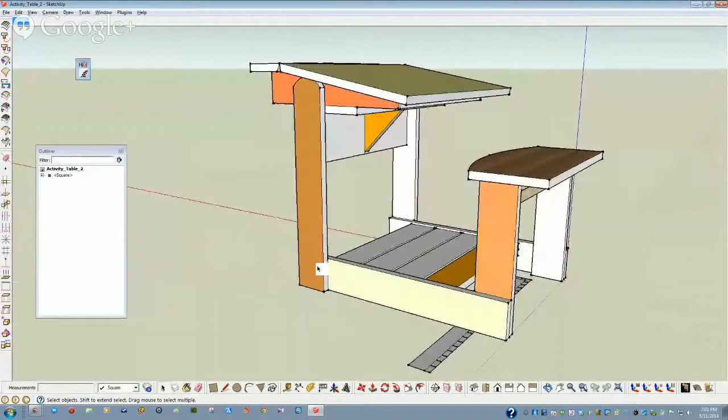I will downsize this one, and I'll open up... it's going, I have a lot of things going. This is the problem child we're going to be dealing with. Whoever did this didn't have any safety rules in his brain. He probably uses a chisel for a screwdriver. We'll just wander around some and show some things just so we can kind of get a look at it.

I went in earlier today and added these colors to try to figure out what I wanted to highlight and use and what I wanted to get rid of. I really don't like the background he's got, but he probably didn't bother learning how to make it right.

One interesting thing here, he's got one component, a square. Why in the world would you do something stupid like that? Get rid of it. Anything you put in here that doesn't do any good is a waste of time, and computer space, which translates into time.

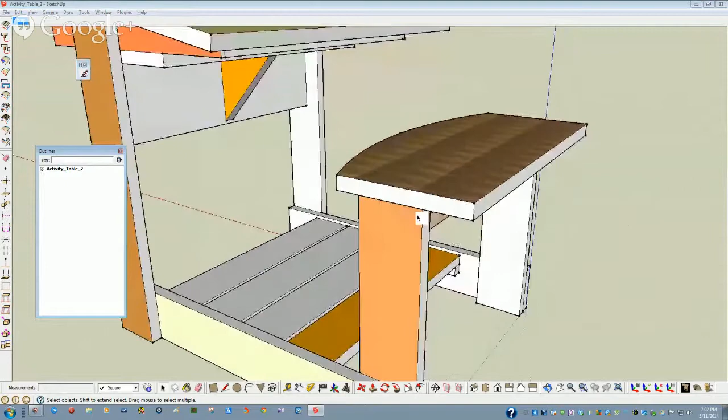Now I'm going to go in and try to clean up this crud he's got right here. That is in the settings someplace. I think it's under... let's see if I can find it. If not, I won't worry about it.

View, edge style, profiles, right here. Profiles make things darker. You can see, I'll go back and do it again, turn it back on. Your view, edge style, profiles. See how things get really, really bright? This line and this line. Why? I don't know.

Okay, back to view, edge style, turn profiles off. Already looks better. We'll go back into view, turn edge style and extensions off. And there's something else there. What are those? Let's go back into view, edge style. Well, we want edges on. Because otherwise, in fact, I'm going to zoom in right here and show you the reason we want edges on.

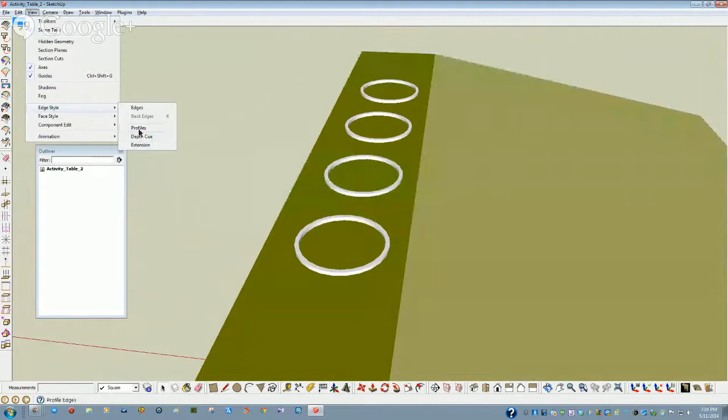Edge style. See this line right here? That is an edge feature, and I have no idea why. No need for it to be there.

Now let's go in a couple more spots here. This is something you really don't want to have on. Shadows do absolutely no good for a design. So I'll go in and turn those off. Go back in.

Shaded with texture is good. Back edges, I like turning those on. It gives me a depth that I can see in back of it. If you don't have that on, sometimes you will be picking things and it will be going to the back edge and you won't know it because you don't see it.

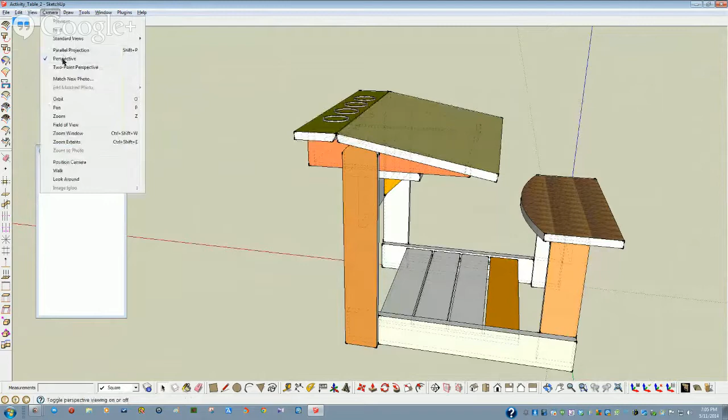What else can we do here? Well, one thing, we can go into view, into camera, and turn perspective off. It is so stupid. For buildings, it's great. For a kid's activity desk, it's ridiculous. And besides that, it doesn't print well. If you have perspective on, printing is going to drive you even nuttier than printing normally does with this program.

Okay, you can see that I have certain intellectual issues with SketchUp. I have with every program I've used. You just have to kind of learn to roll with the punches.

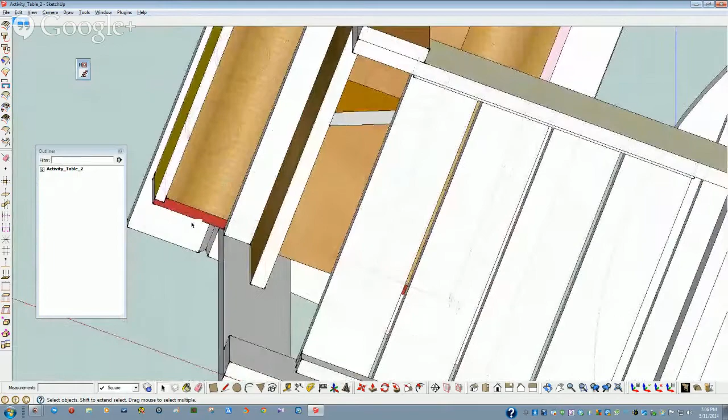Something else you would really want to do, either as you get started or just very shortly after, is decide what kind of joinery you want on this. He's got two rebates on this, and that's the only fancy joints he has. You could screw and screw, yeah, glue and screw this, or you could simply nail it. This would be a real nice one for pocket hole joinery. If you're really crazy, you could go with biscuit joints. I can't afford a biscuit joiner, so I ain't gonna do that.

I'm yawning because I'm talking in a lecture voice, and it causes me to breathe differently.

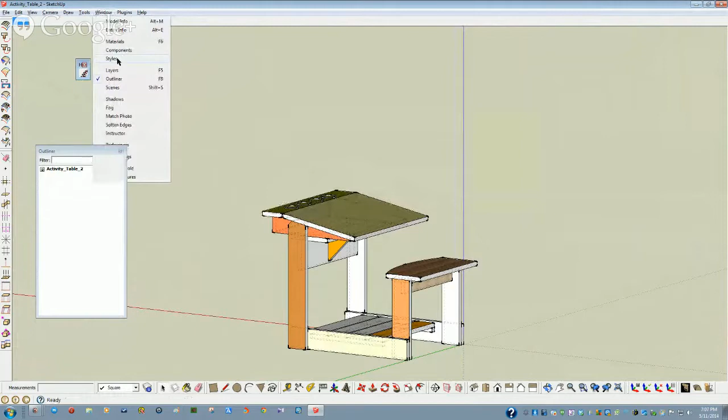So here we have... let's see if I can turn the style off some. I wish I could go find my own style, but I can't. So we won't.

I'm going to change this to a nicer light green. I'm going to go into the color wheel if I can find it. There it is. Let's see... oh, that's not a nice one, that's ugly. Back to the color wheel again. That's somewhat better, it's easier on the eye.

In here you can change how this responds to you visually, the selection. So when I go in to pick something... oops, wrong button. I'll get it. It highlights blue around it. A lot of things you can do with it, some are important, some aren't.

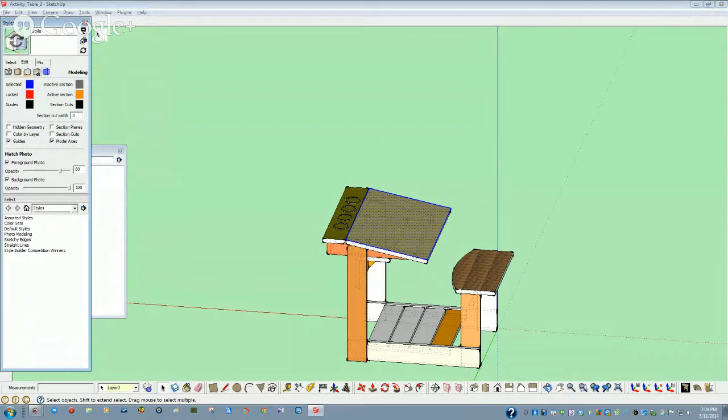So, enough with that. Now these spaces that I have highlighted, I'm going to select all of them on one side here, and I'm going to move them out with this key right here. I'm going to copy them out 10 inches.

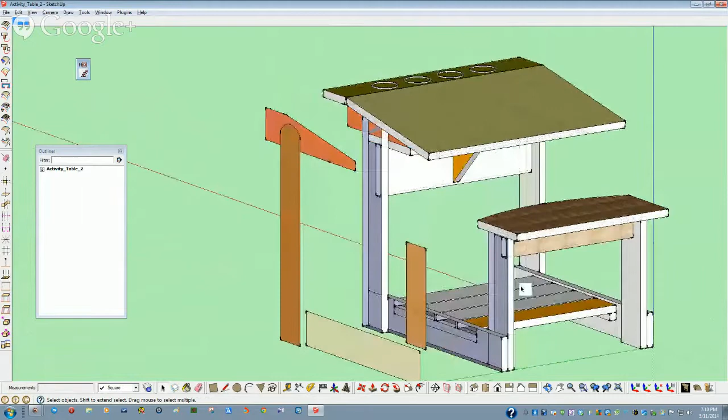Now I'm going to go in and get rid of that one, and that one, and this one. Now these are made out of standard 1-inch lumber, so they're 3/4 of an inch thick.

One thing we'll notice in here, on one of these, if I can find it - well, first thing is I'm going to take this top, I'm going to copy it up 10, and I'm going to get rid of this.

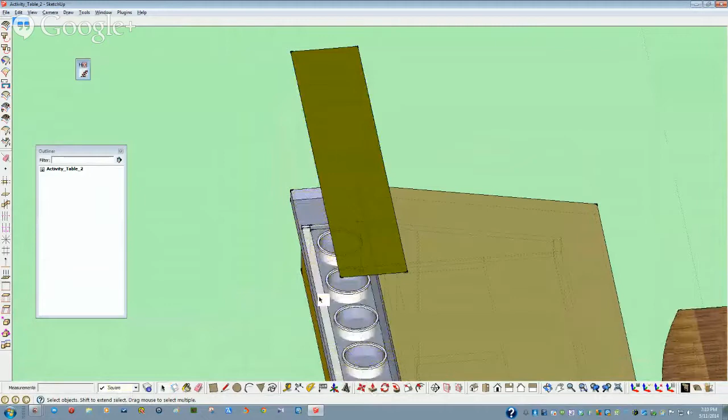And you'll see some really strange things going on inside this thing. These are cups - you couldn't tell it the way he had done it before. I have no idea how he managed to put these circles in here without putting holes in this plate. I have no idea, and I don't want to know.

But I'm going to take this top, the writing surface itself, and I'm going to copy it along here 10 inches. And we'll get rid of this surface too. All we're doing is going in and cleaning up and seeing what this guy has done to us.

I'm going to select this surface and this surface and move it 10 inches along the red axes. Yeah, I also got one of my circles there. That's all right.

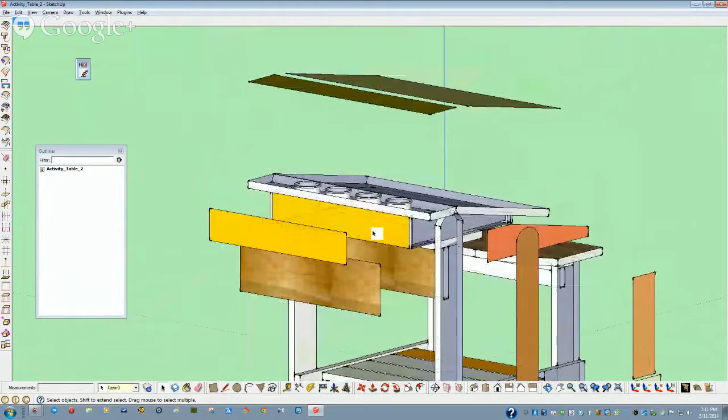So now I'll go into this one and this one and delete those. My hotkey for delete is, surprise, delete.

Now, I actually could come over and take this surface and this surface and move them out also, but that doesn't make any sense, because when we get done, for the time being, this board and this board are going to be used twice, as will this one. So I'm just going to delete these.

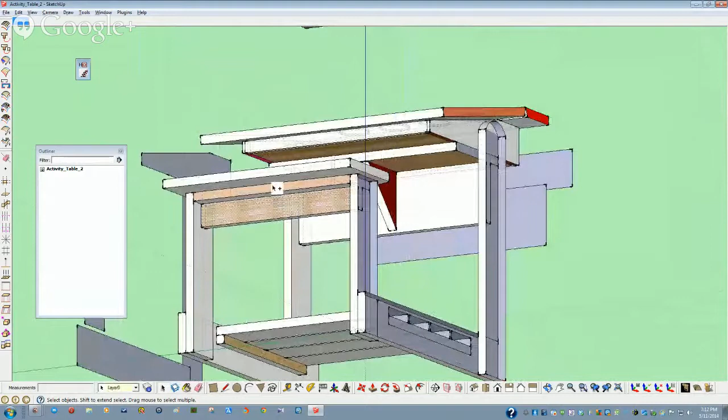So now we have more geometry we need to move. We need to take this one and move it back, copy it back 10 inches. Why 10 inches? So I won't forget what I did.

You'll notice that when he created this thing, his brilliant joinery, the way he made this geometry constructed, he put a hole in the side of it. Probably not the best combination you've ever come up with.

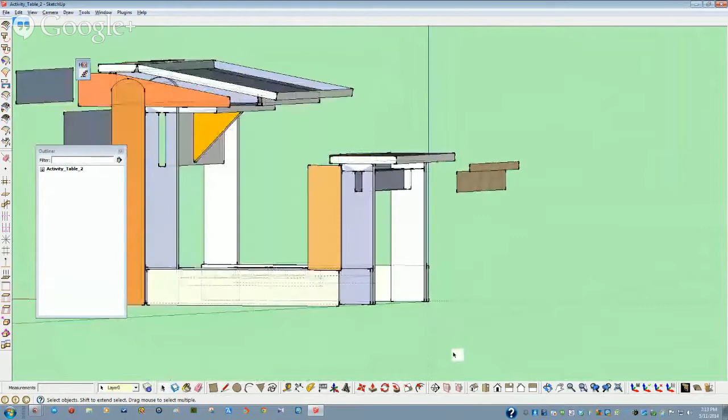I'm going to take this one and move them vertically 10 inches, copy them rather. And go back in here, and here. And I hold the control key down to get more than one.

And now we have our floorboards, we have our uprights, we have our seat, we have our reinforcing boards. One thing I don't have done yet is this triangle, and I'm just going to leave that for the time being, because I'll get to it after I move some of the stuff around.

So now, let's go in and give some of these things depth, or make some components first. Triple mouse button, Shift C is a hotkey. Create. Double mouse button rather to get this.

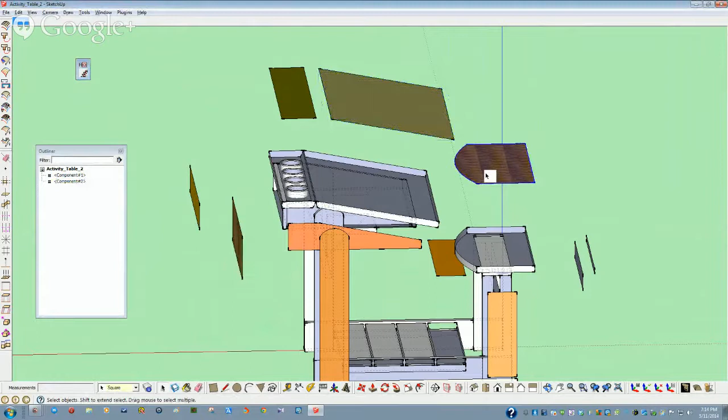Shift C, create. And I'm just going to do this a whole lot, so I'm not going to say the same thing time after time after time, so I get bored doing it. If you forgot, hit the rewind button.

Because bookkeeping and file maintenance on this is no more fun than on anything else. And that's all I'm doing.

Okay, now let's take all of these components, start at the top, hit your Shift key, go to the bottom, and let's hide all of them. See what we still need to do. We have one here, one here, one here, and one here. Okay.

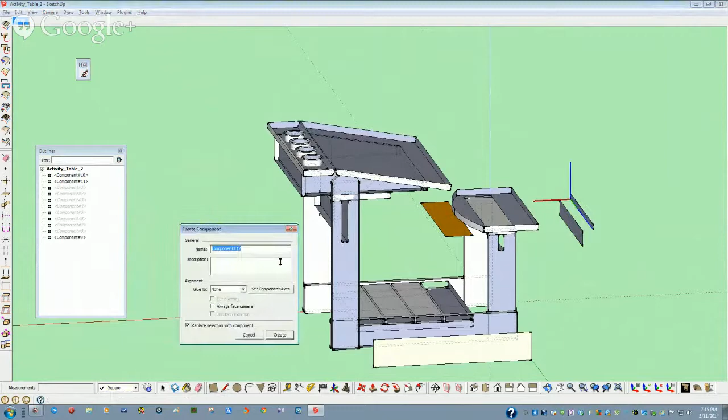Now, a lot of people have complained that I don't go through and give these things proper names once it's already a component. I don't care, because highlighting it tells me what component I'm dealing with. For those that need it, what would you call this? Bottom side panel 1, front side panel 1, rear side panel 1, and then side panel 2, side panel 2? No, that doesn't make any more sense than what I'm doing.

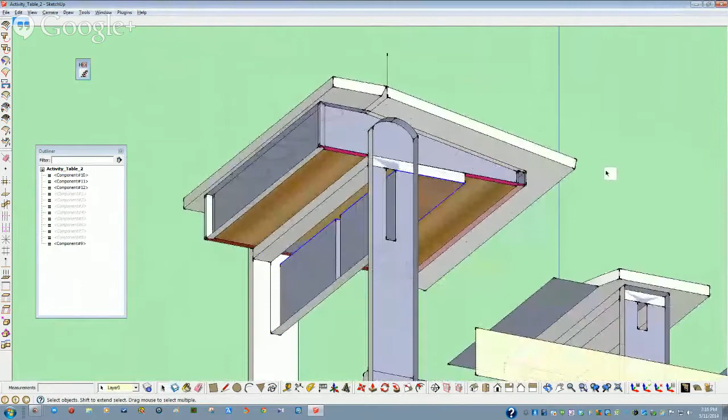Okay, I'll leave this one here and just make it a component right now. And I'm going to make this one a component too, and you can see what I was getting at here. Have I made this one a component yet? I have not. Let's unhide everything — yes, this one is not valid yet.

So what I'm going to do is go into this and delete this thing. In fact, I'm going to delete most of that — it's not doing me any good. Now, the way he created this makes this and this two separate entities. I'm thinking, since the joint is on that surface, it's supposed to be one entity.

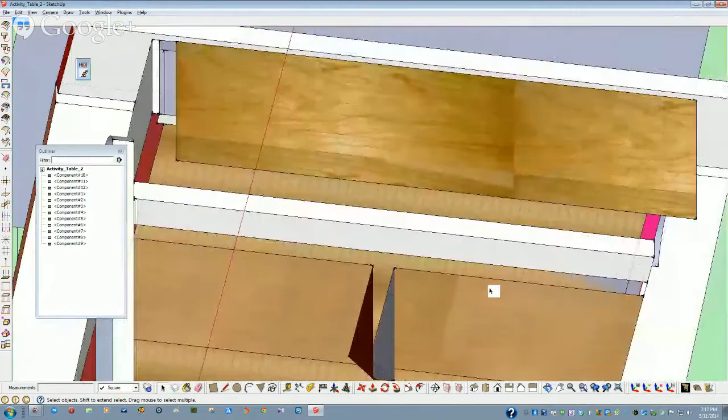So I'm going to twist this around a little bit, try to grab some more of it, not get rid of too much, but at least enough that I can see what I'm doing here. Let's get rid of this one. And lo and behold, it's too much. So I need to come in here. Try to keep up with what you're doing, because I'm getting confused.

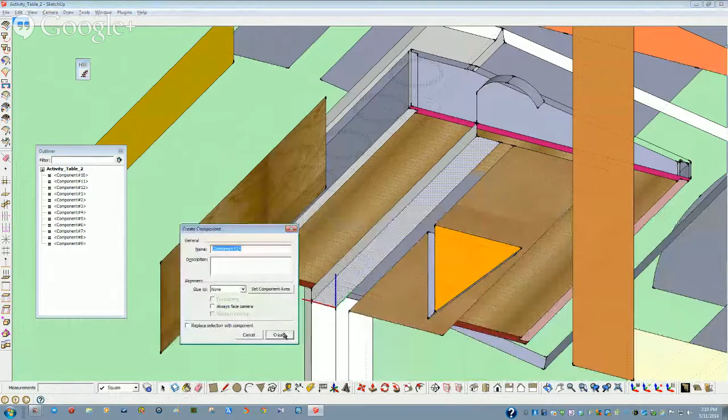Let's get rid of this bottom. Well, I'm working on that bottom panel right now, and that's the problem. So let's select this — Shift C to make that a component. I hope I got the whole thing, but I'm not sure I did. Yes, I did. Okay, so take this one out.

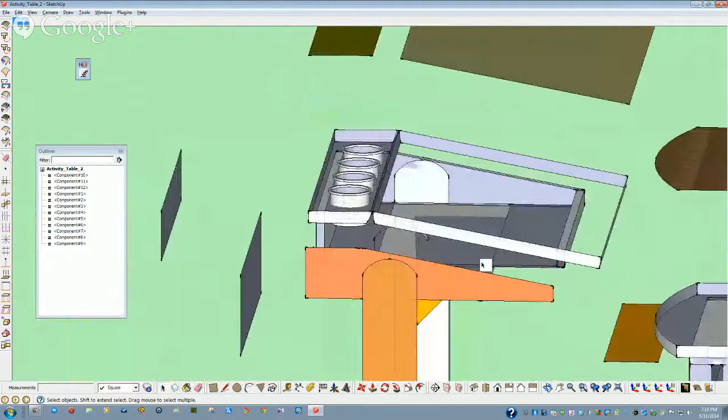Let's take this bottom panel out too. And we keep uncovering more junk is what we're doing here. See all that panel on panel on panel this guy had? I'm not sure I've got it cleaned up yet. And after looking at this, I'm not sure what he was doing.

We may end up doing some rework in here. I may have gotten rid of too much. If I did, I did — oh well. In fact, I think I did, because this one needs to be completed. I'm having trouble with my equipment here.

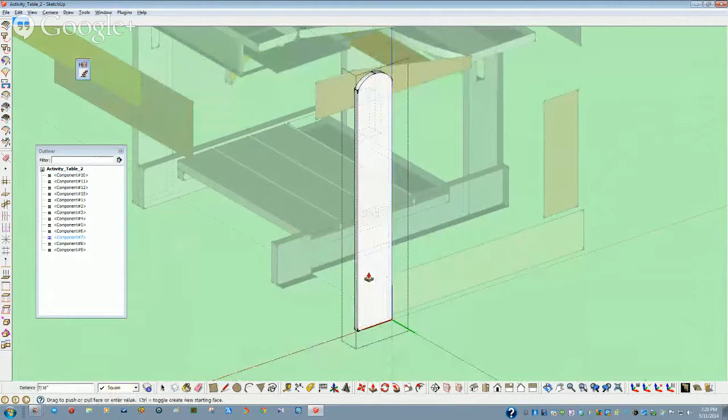So let's go to our outboard features and start making things. We'll activate that one first. Go to extrude, 0.75. And again, this is just a whole bunch of busy work.

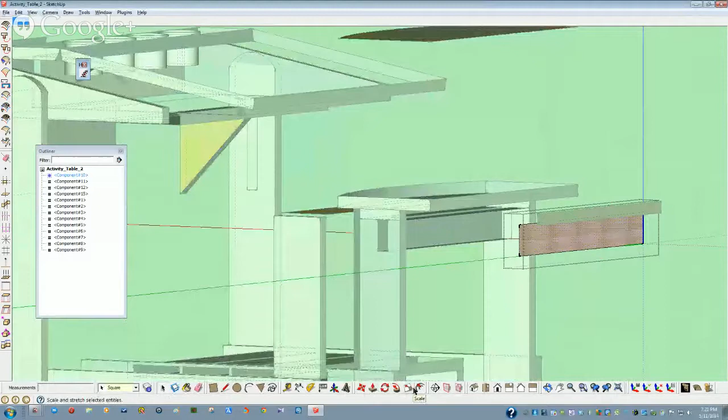Now we already have several key features of this component done. This one is not going to be a 3/4 inch extension. Okay, I'm trying to figure out what we really had going on here. Let's make this one 3/4. All right, and this one.

I selected that entity — I want to try to find out how long this thing was, whether it was supposed to go through or not. So I selected it, mouse button 3, it's an inch and 3/8. So to start out with, that's what I want to extrude, push-pull, this one, 1.375.

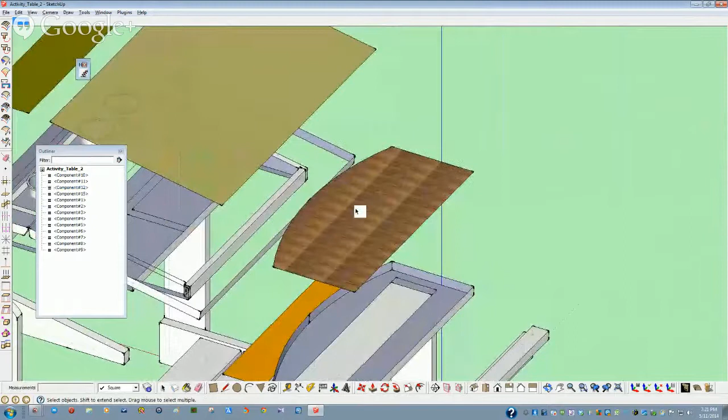So since I need to extrude this one, this one, and these two, and this one, and while I'm at it, I'm going to do this triangular piece. And I don't like this triangular piece — we are going to change that.

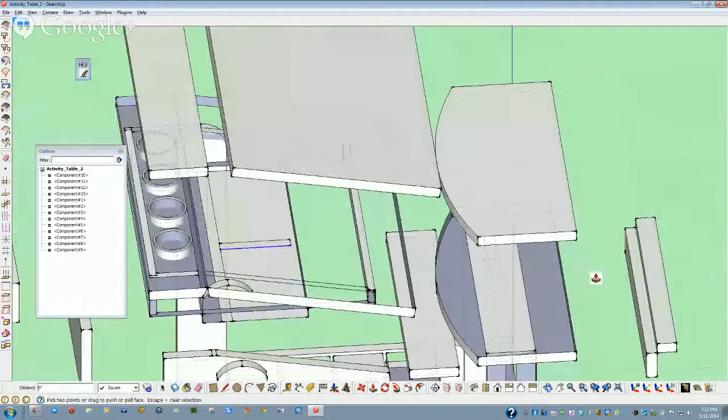In fact, if any of you are klutzes, you're going to notice all of these sharp edges and say, why aren't they rounded off? That's your choice when you're building this, because sharp edges hurt your legs, your elbows, your thighs, and certain parts of the male anatomy.

So we have, let's see, it's good solid. Let's get rid of this right here, and get rid of this, and get rid of all of this stuff in here. Now we're starting to clean this thing up some, so it starts to make sense.

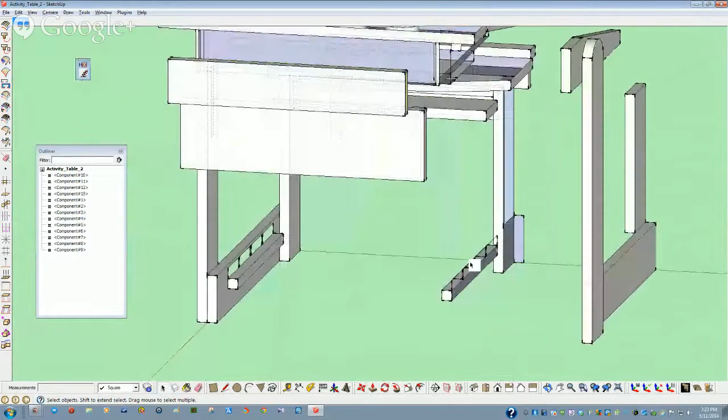And aha, you got me — this right here is supposed to be part of that rail. And guess what? I didn't notice that because it was just too much garbage. But that's easy to fix. All I did was go in, made that component active, selected that face, and used extrude push-pull from point to point, and now I have this feature finalized.

So now, oh, I have one more feature that I need here — this one right here. Shift C and create it. Go in here and delete some of this stuff, and extrude this thing 3/4 inch.

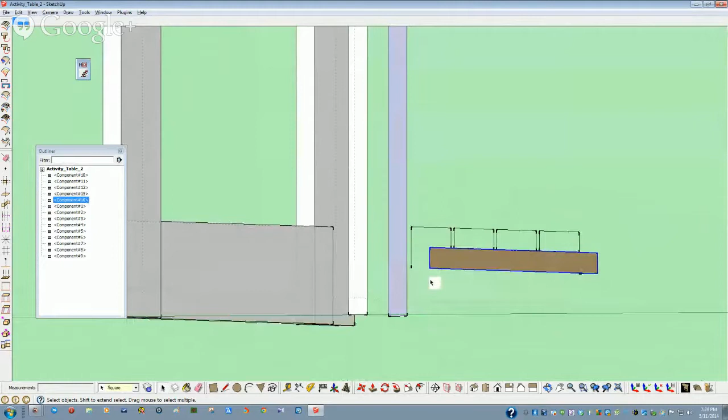And you notice it didn't do 3/4 because it remembered what I had done last time.

Now I'm going to go through and add some more color to this. I'm a little surprised my color... ooh, that's pretty weird, that didn't work at all. Okay, I'll fix that in a minute.

My hotkey is Alt B because their hotkey is just B. And when I go to hit the space bar, I have fat fingers, and about 8 out of 10 times I hit the B. I have to wait for this thing to cycle in. I have created some of my own colors here.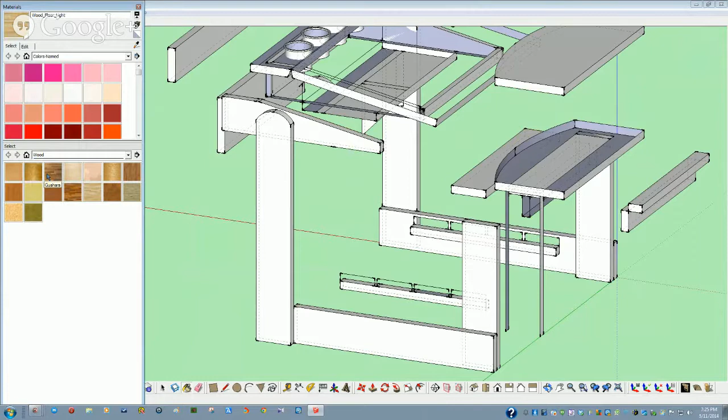This one, the two light maples are mine. The Guajara is mine, cherry is mine, birch is mine.

And I think I just saw another problem. Yep, I did. This part is too short because of the way he created the stuff. So again, we'll push this one. Actually, we're going to extrude it, pull it this way from point to point. If I can get it point to point. There.

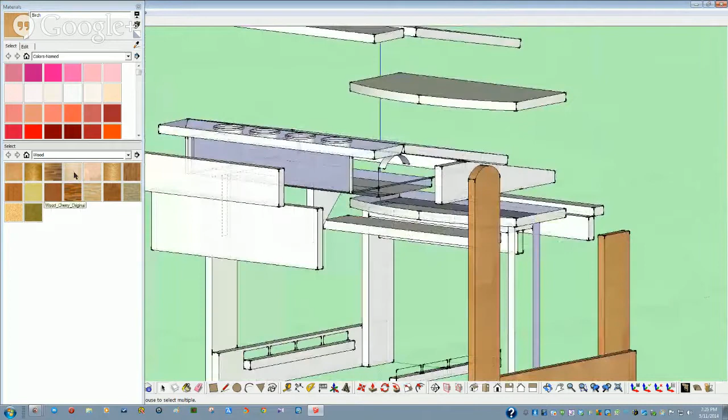Now I have my side posts and part of my desk tray set up. And I think I'll make the tray Guajara.

And since this is part of the tray, I'll make this part, and this part, all Guajara. I wonder if I can do all three at once. Yeah, I did.

And just for grins and giggles, because I'm going to make the seat green, we're just going to paint that sucker. In fact, you can paint this off, you can make it painted crayon colors. This is your model, your choice.

That's what happened. It created a component, but I didn't watch what I was doing. See? What I was telling you, when that doesn't highlight, it creates an invisible component, and it's there someplace, and it's just all confused.

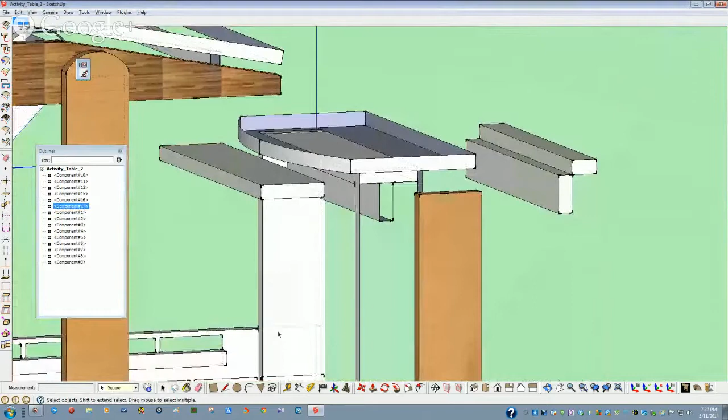In fact, I like my idea of making it multicolor, so I'm going to go do that. 0.75.

Looks foreshortened. Okay, Alt B.

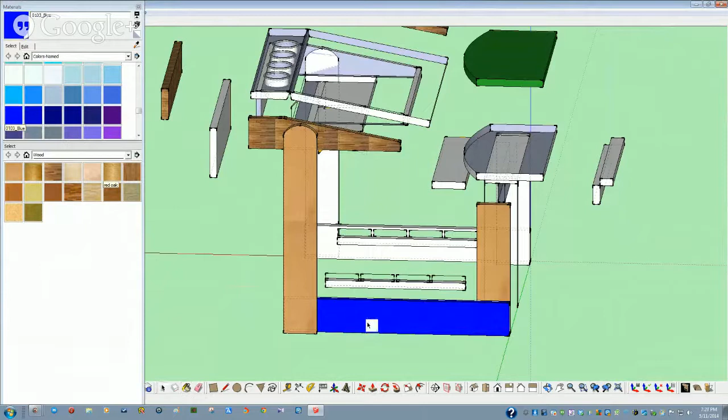Blue. Yellow. I'm looking for bright red. There's red. There.

What do I want this part? Let's go for... I was looking for cyan. They don't have it in here, or if they did, I just didn't find it. Okay.

Nice golden rod there. And for the footrests, dark brown.

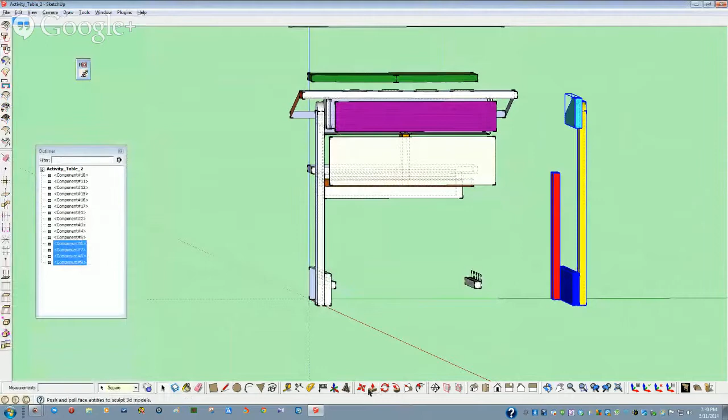So now, let's take and get rid of these because we already have those created. And we'll take this part, this part, this part, this part, and this part, and move it. And we will move it this time because they're components, so they'll move. Back inboard.

10 inches. Now, I just ran across a problem. Because of this joinery here, this part will not be able to be an identical part. But that's okay.

What I'm going to do first is take this geometry and get rid of it. Now I will take this and move it corner to corner, here, to there, and I moved it. You heard me say it, and I moved it.

Guess why? I wanted to copy it. Control Z. Grab the part again, hold the control button down so you have our little cursor that's got the plus on it.

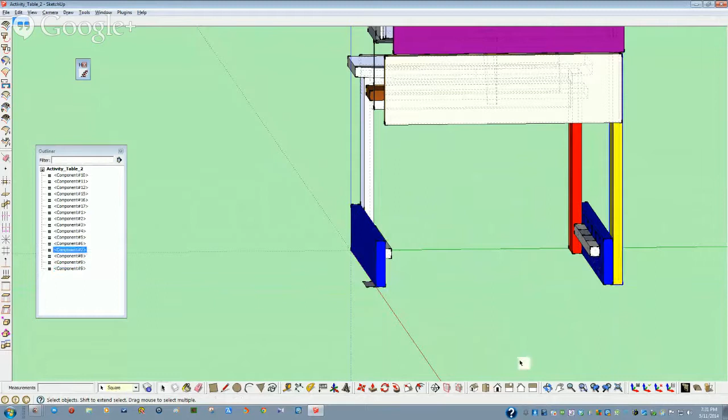We'll do the same thing with this one, only we won't do it wrong first. And we'll move... no, set it in. We'll copy this one in that corner to that corner.

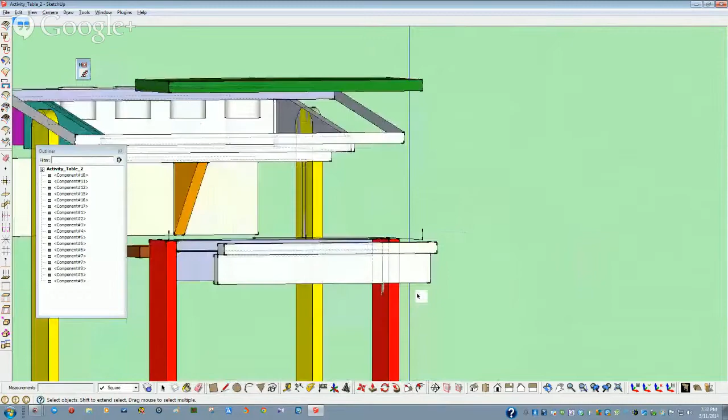Let's get rid of some stuff here and try to figure out what he is doing with our seat. I do not know. I don't know if this is supposed to be a whole board to reinforce the seat. And since I don't know...

I know what I'm going to do. I'm going to take this. First, I'll find out how long this is by infoing this edge. I'll do this edge because this one's sort of gobbledygook with other junk over there. Dimension, you go here, it's 3.5.

It's a 1x4. Okay, I'm going to make this one active, and I'm going to increase this one by 3.5 inches.

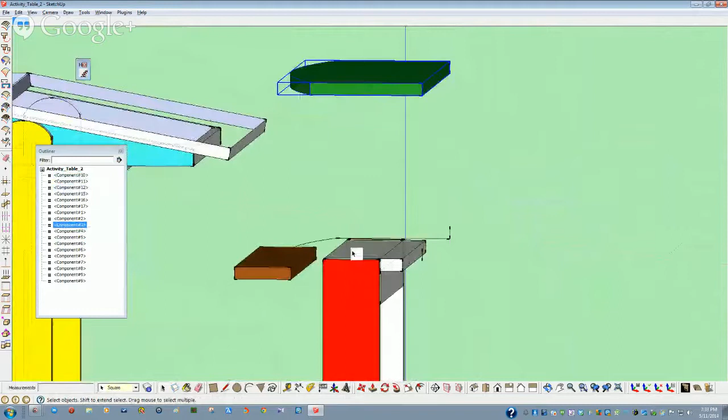And I will take these two components and move, and I want to move them this time from there to there. And now I want to take this component and just move it straight down 10 inches.

And I can see... I'm going to hide this component, and I see what I'm doing wrong. So rather than just Control Z, I'll just go back, mouse button 3 on that component and put it back in.

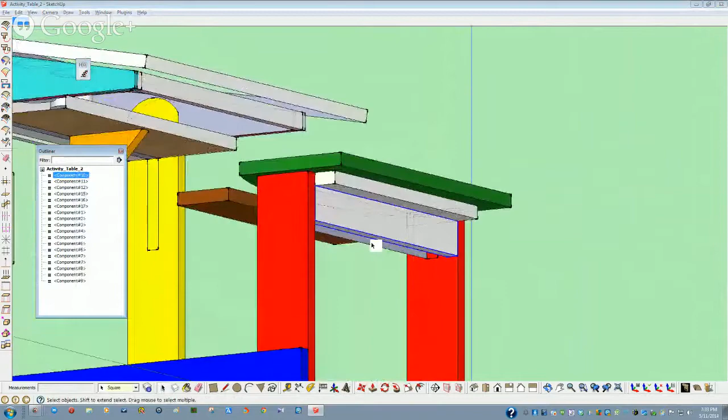When I move this, it didn't move right. I thought I moved all of these 10 inches, but obviously this one didn't move that amount. So I'll take that and move it point to point to here.

And he's kind of got it centered in the red beams now. He's got the seat reinforced so that even I can sit on it.

I'm going to take this component, even though it's going to have to be unique, I'll show you how to do that. And I'm going to copy it from this corner all the way over to that corner.

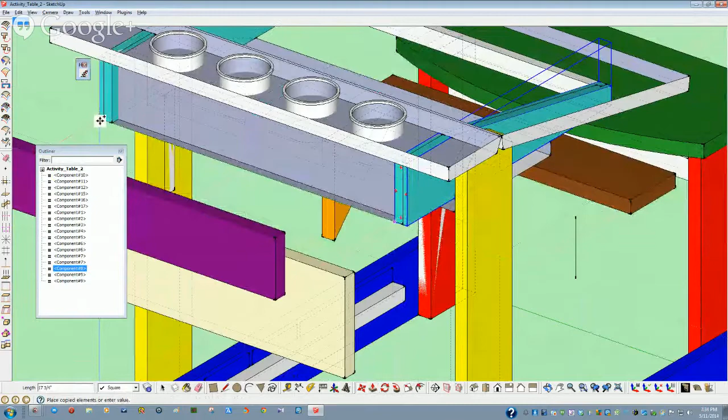Now let's move this stuff back in along the red 10 inches. And now it's beginning to look a little more solid.

Now we'll move our floorboard down on the green axis 10 inches or more. I'll just go ahead and do it point to point.

Now, I'm really surprised, that's some weird dimension. If y'all figured out what I did wrong, email me, message me, something.

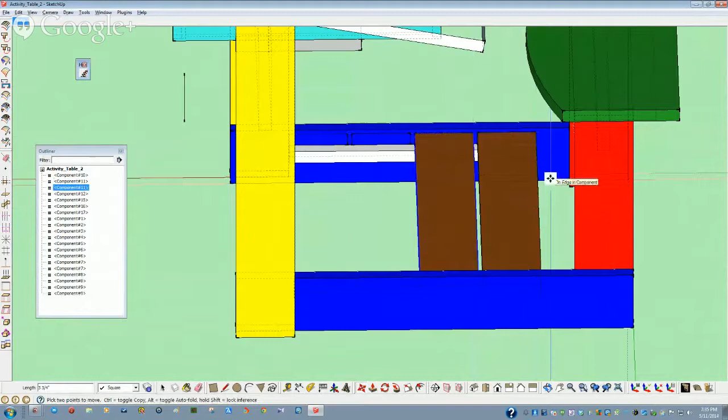Now, we need 1, 2, 3 of these copied. So I've still got that highlighted. Go into the button, but like I said, copied. Select that point, hold the Control key down, go to our spacing, and then type in 3x. And now we have our floorboard done.

Or do we? Do we still need another component over here? Ah, yes, we do. So we will grab this one. I'm trying to find out a good place to move it from the 2. Copy it. I will take it from this point, and I didn't go far enough, but okay.

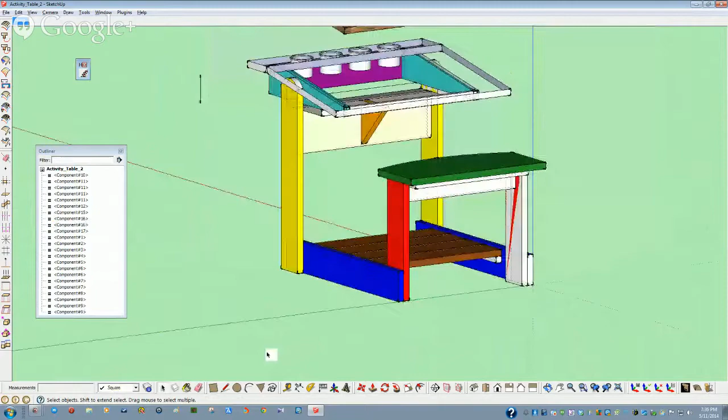Now, we'll take our top 2 boards and move them down. And this one I'm just going to move after I reselect it. Move it from point to point so it comes here.

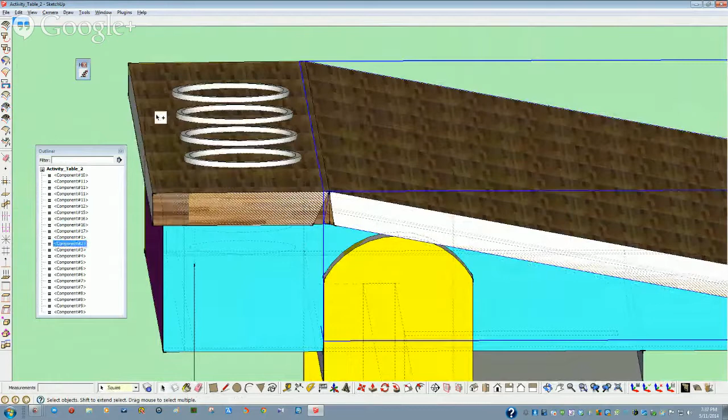Now you'll notice that he had a really big gap here. Now, Control Z, let's do this. I can't get that one to highlight. But you can see he had this really big gap here. I don't think he wanted it quite that big. So we'll go ahead and fix it later.

Okay, now we have a whole bunch of stuff in position. I don't have my bottom board figured out yet. I don't think I really want a 3/4 inch board all the way at the bottom of that thing for...

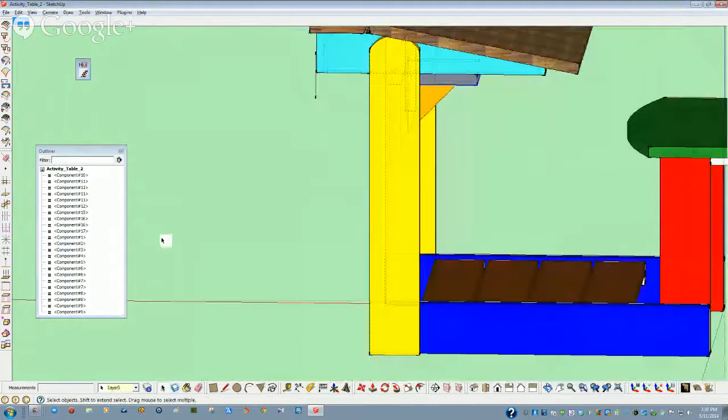I'm getting all sorts of weird things like this. I'm not grabbing my components. That's what happens when you have too much junk geometry floating around.

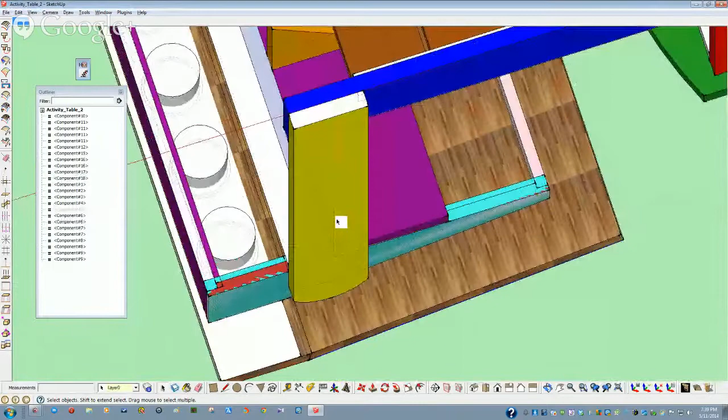Okay, let's get rid of the side post. Let's see if we can figure out what's going on with this thing. Okay, get rid of that line, get rid of this line. Well, that's part of the problem. It's split.

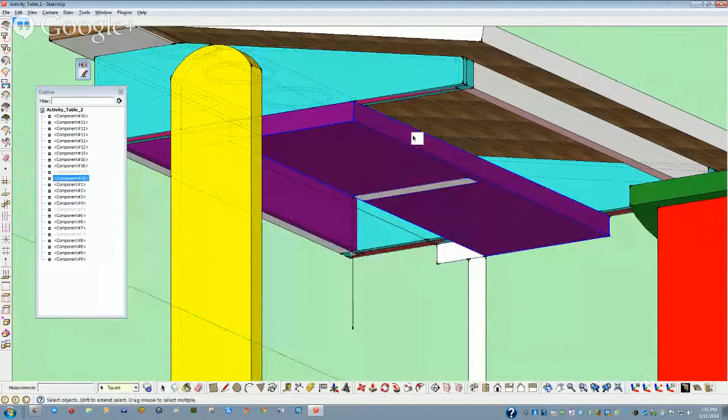Okay, let's get rid of this one. Let's close this in. It's split. Okay, we'll have to hide the top too.

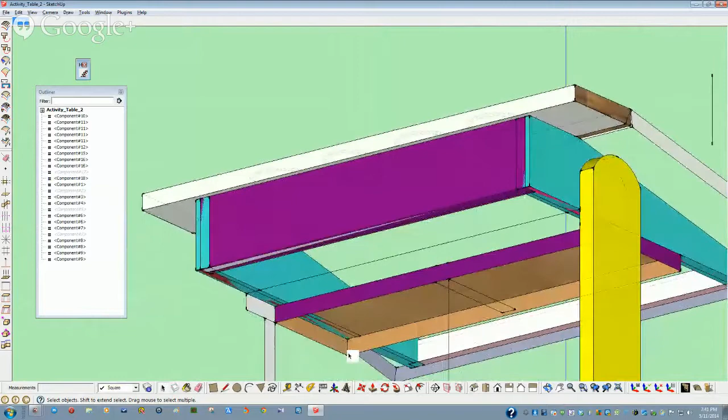Well, since I have a face here, I'm just going to pull that face out. There, healed. This line, that line. Looks like this is actually supposed to come all the way out. Put this line back in, and it's nothing again.

Now if I put it in my work, that probably wasn't working in my... Yes. If you don't work in your active component, or the component you want to work on, you don't work. It's really ornery that way. It's a good program, but it doesn't read minds.

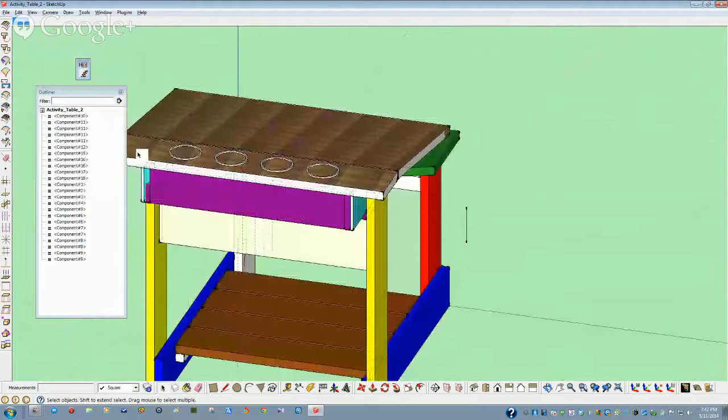All right, let's unhide everything. Edit, unhide all. And now I'm going to hide all of my components and see what we have left.

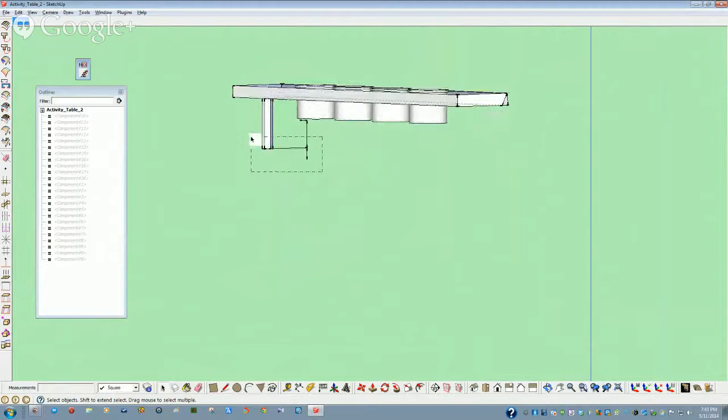Now, one thing you'll notice is that these crayon cups don't have any volume. This wall is infinitely thin. That's not a real good way to hold things together. What I'm going to do is go ahead and try to create... actually, I know what I'm going to do.

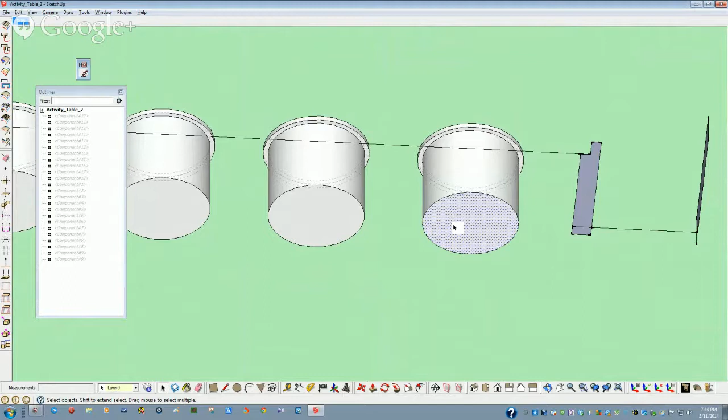I'm going to select this, and I'm going to hit Shift C, make that a component, and I'm going to get rid of the middle part, and I'll go in and activate my component again, and I'm going to extrude this up that far.

And I'm going to go into the column. My component's still active. I am going to go into this feature, which is called offset. And I'm going to grab this, and I don't want to make it that thick. I'm going to make it 1/8 of an inch. We're probably going to buy plastic cups or use yogurt cups or something, but I don't have a lathe, so I'm not going to machine this part.

And now I'm going to push that back down. Let's try 2 to start with. Looks like a pretty good element. Okay, let's see how long this one is.

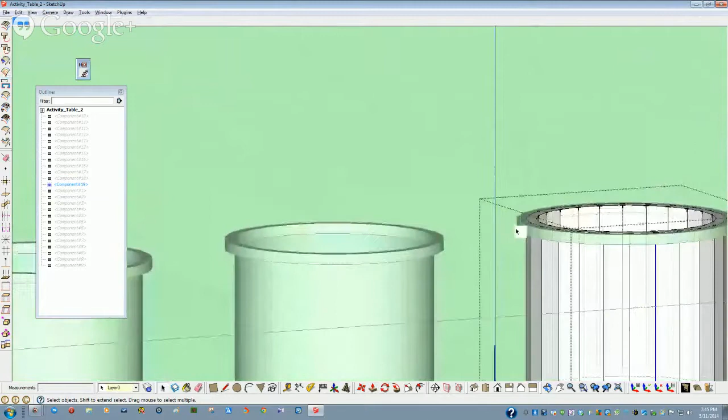Maybe in 2 1/8. Wow! Folks, that was just a lucky guess. I promise I won't do that again.

Now I'm going to go back into this when I'm going to try to extend it out a little bit, or offset it out, so I can get my lip in. So let's go here, all the way out there, and now I'm going to try to delete that, delete that, delete that.

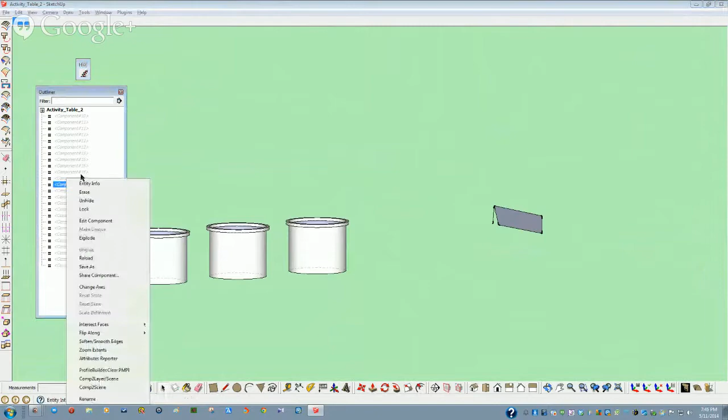Right now I'm going to hide that component, but I got more stuff in there than I want. Okay. Now, that was number 17, or was it 19? I don't know what it was. Let's unhide 19. It was 19.

And now we'll go into this component, make it active, and try to pull this lip down. I'm going to make it 3/16. Okay. Here.

Now we have this, so I want to copy it. And it looks like about 4 inches, 3 times.

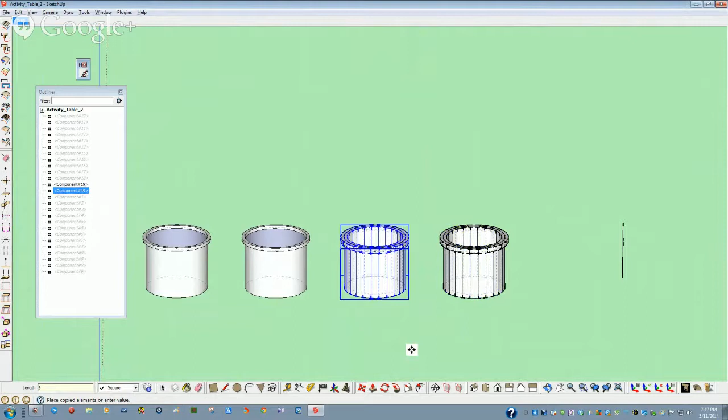Now we'll go back to unhide all. And now we need holes in our top here. So what I'm going to try to do is using this geometry right here, hopefully these are 180 degrees apart. I'm going to create a line. I don't want to be in my active part, I don't want that component active, it'll mess it up. Line function, from here to there, and we'll see if that's in the center.

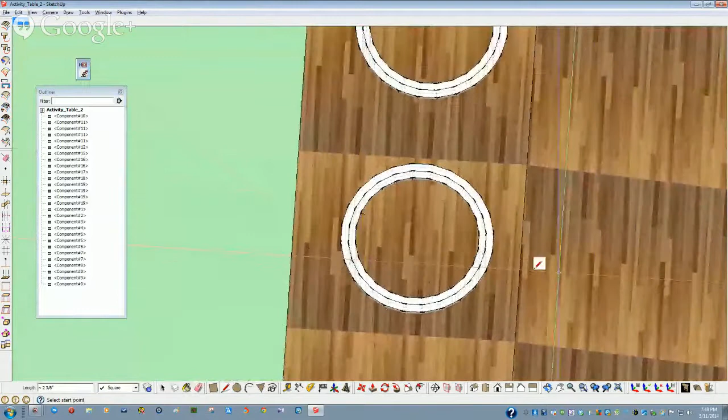Now I'll have my top plate active, and I will try to create a circle on the center of that edge, midpoint. And that's definitely not in the center. Okay, plan B.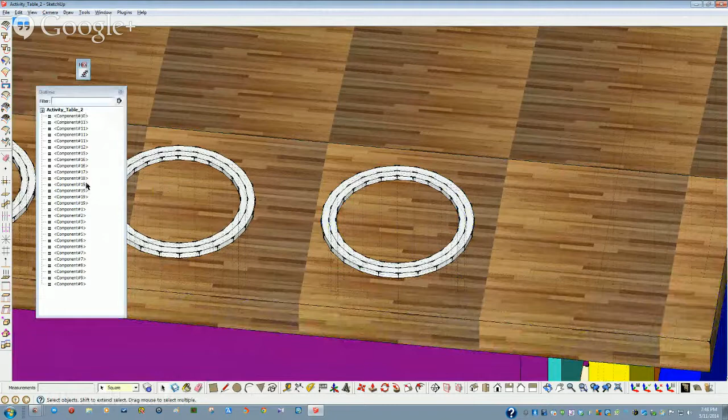I'm going to take this component and intersect them. Edit, intersect faces with model. Now I'll hide number 19. I shouldn't have gotten those up there. And I'm still going to have basically the same problem.

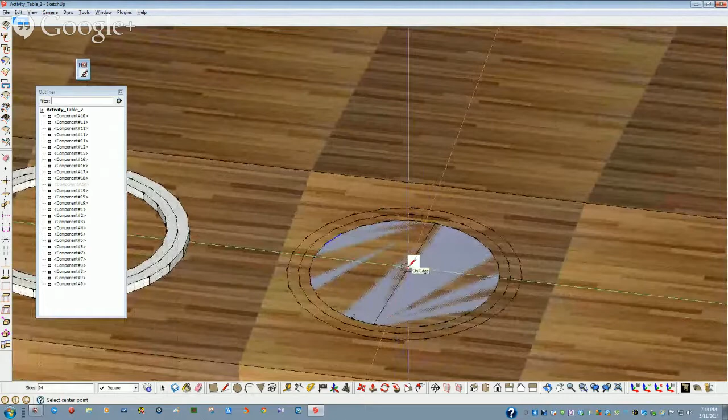Okay, let's try the line function again. Go from this one to that one. Now let's go in circle finding. See what I got? We're trying to get a midpoint or an endpoint. It was getting one below that. Midpoint.

Except I wasn't in my active part, so now it's just on top of the thing. So I'll go Control Z, Control Z. Oops, let's do Control Y because it got rid of my line too. Now I'll make sure I'm in the work part. At least I know what size I want my hole on.

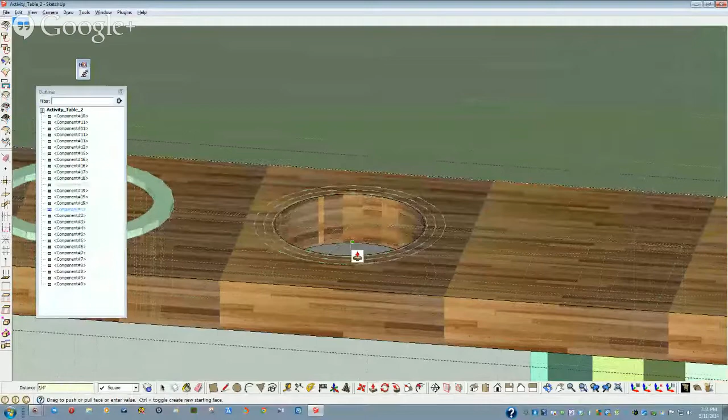And this one needs to get extruded through 0.75. Again, I'm going to hide all of my components. No, I won't, because it doesn't highlight. Hide. Hide. And now get rid of all this junk.

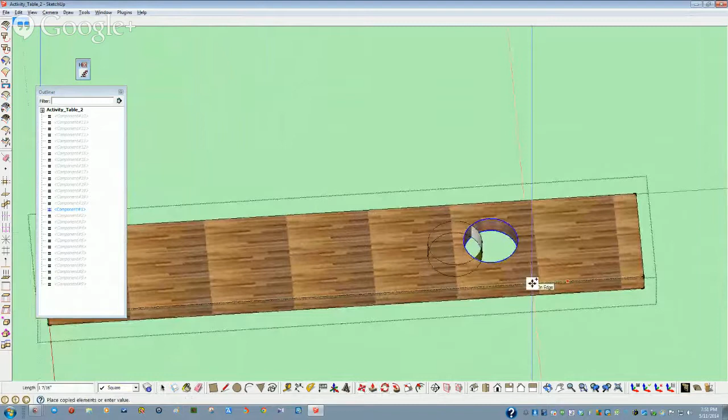I'm going to unhide number 1. Make it active, that active, this active, and this active. And if this works, I'll be surprised. Copy. It's 4 inches, 3 times.

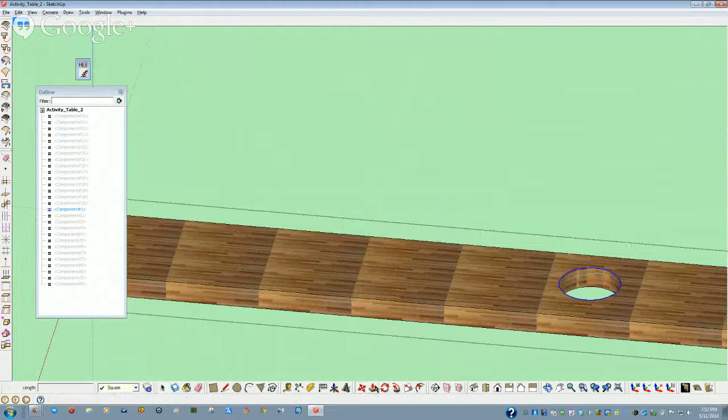Definitely didn't work. It should have done something with those arcs. Okay. Control Z, Z. Control Z, Control Z, Control Z, Control Z. I'll just do the top one. 4 inches, 3x. Now, good.

The faces are reversed for some reason, and that's a nuisance.

And I'm just unhiding everything to see what we got here. The only thing I do not have in there, well, I don't have my end board in. There needs to be, in fact, that was also rabbeted in. What I'm going to do is just go from this corner to this corner and create a face.

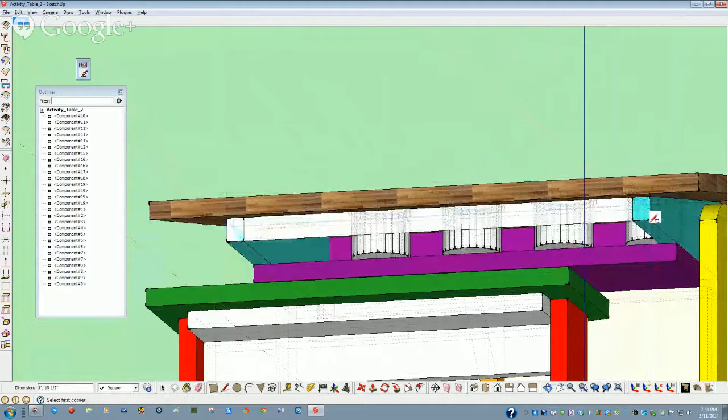Make it a component. And now it's not going to be technically right. Extrude it 3/4 inch. Now, why it's not technically right is we have an interference here. That would be something you would clean up in a few minutes, as would this issue right here. Right now, my time is almost up, my host is almost gone, and we don't have a bottom plate in there.

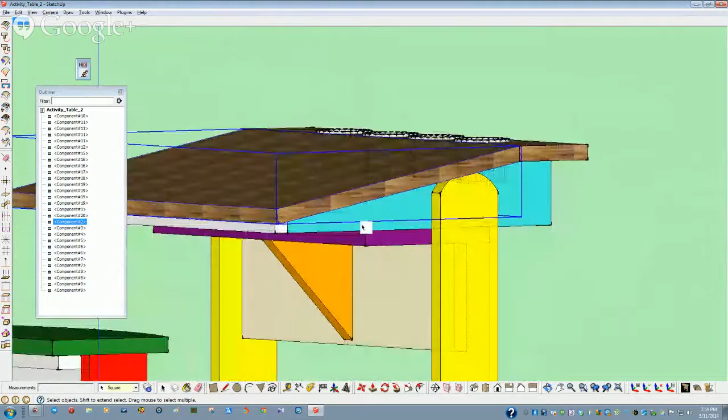We can make it 3/4 or not. What I'm going to do is hide the two top parts, and I'm going to go in from this corner on a rectangle, that corner. I didn't hit it, it grabbed something in the background. There. Make the component, create, make it active, and I'm not going to put that 3/4 inch.

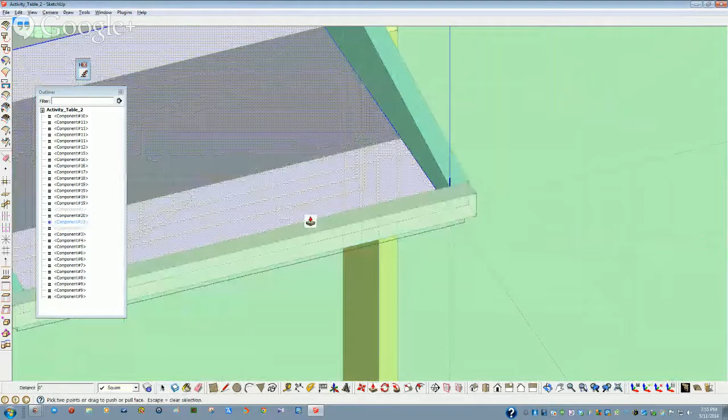That's going to be 1/4. That's good enough, thank you baby. Unpick my two parts. And save it. I have components here, here. Yep, they're all components.

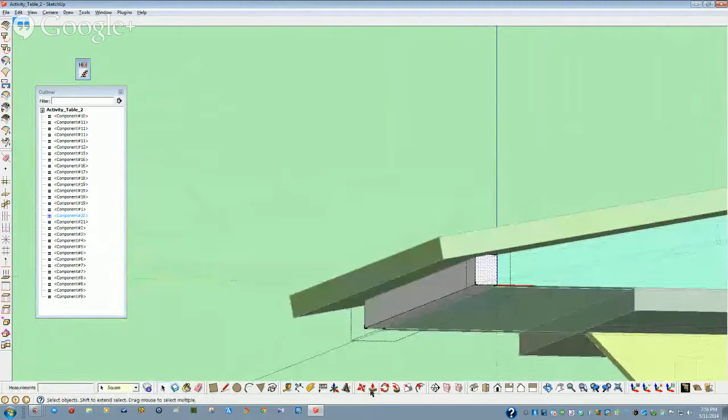And move that from this point to that point. And then I'm going to change my bottom plate by 3/4 also. There. Done. That is how you take a model that is totally bogus and make it pretty much cut list ready.

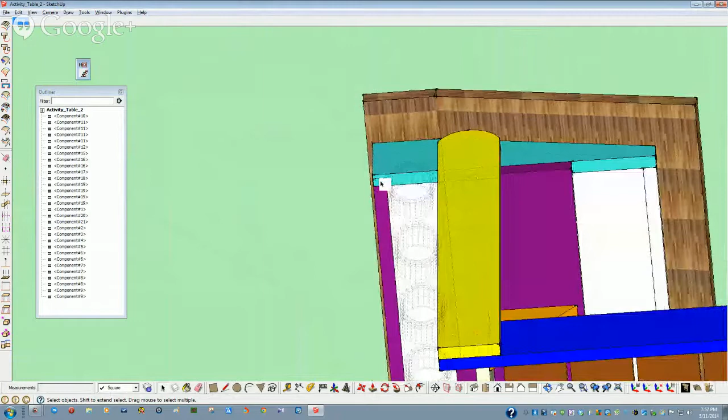It will not like these holes here. Yeah, you'll have to filter those out when you do it. You can figure out your own joinery here. I did not bother making the rebates here or here. Chances are I just use pocket holes on it. So, there you have it.

A little calculation of our relief right here. Looks like maybe 2 degrees, 3 degrees each side. Plane it down and we're all set to go. And then round all the corners off. Push it out there, file, save.

If this wasn't so heavy, I'd like to make several of them and send them to my grandkids in North Dakota. Turn the screenshot off. Readjust my camera after diddling it around.

Like I said, overcome your fears, get out of your comfort zone, learn how to use your tools, apply safety measures. You will have a very comfortable life. Might get hit once? Yeah, you might. But if you have a good firewall and a good antivirus program, pretty hard to get hit. Being afraid of technology, you might as well go back to axes and adzes, guys. Except use dull ones because you won't know how to use them.